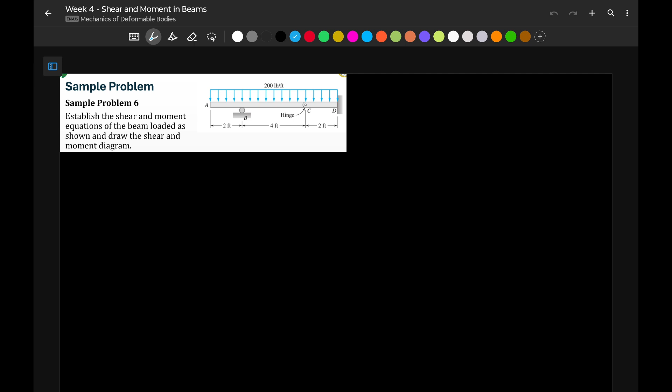Magandang araw. So we have here a sample problem of shear and moment diagram. We have a beam A, B, C, D, with the zones indicated. It is subjected to a uniformly distributed load of 200 pound per foot. Initially, this beam looks like a propped beam, but if we look closely, there's an internal hinge at point C, which makes it a statically determinate structure. So for structures like this, we normally cut at the hinge, and the hinge becomes a pin support.

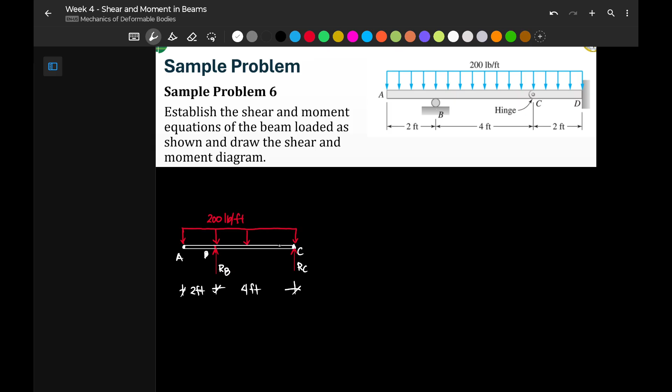Now let's proceed with the lengths or dimensions of the beam. We have 2 feet here, then on this side is 4 feet. We can take summation of moments at any point to determine the reactions. Let's take moment at point C first since it's easier here, because at point B, the rectangular load would be divided in two.

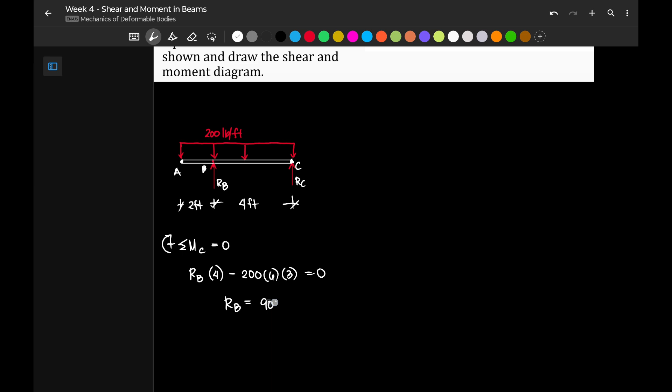So summation of moment at point C equals 0, assuming clockwise positive. We have RB, which is clockwise, so RB multiplied by 4 feet, minus the uniformly distributed load which is 200, total length 6 feet, so half of its length is 3 feet, equivalent to 0. So RB is 200 times 6 times 3 over 4, we get 900 pounds. That is the reaction on B.

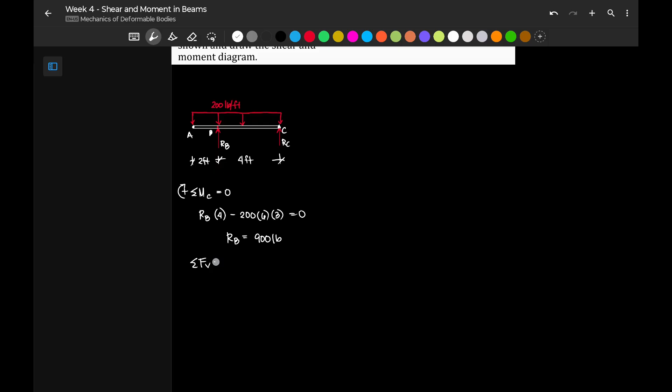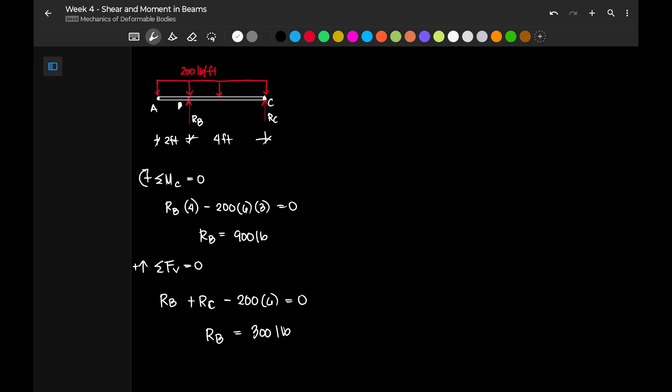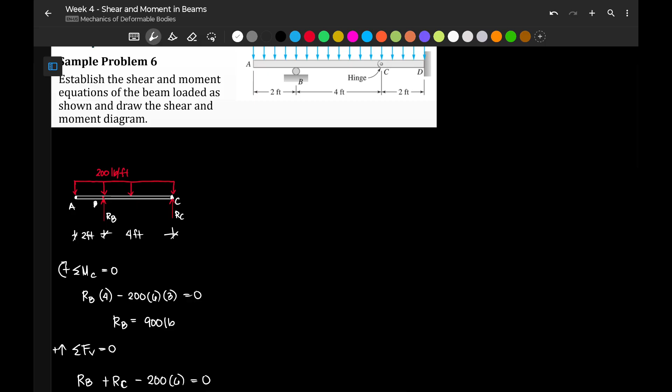I took moment at A. Next, since we already know the reaction at C, let's proceed to the second segment of our beam, which is bar CD. For bar CD, we have a fixed ended beam or fixed support here. This one's a fixed support. The uniformly distributed load of 200 pound per foot is still there.

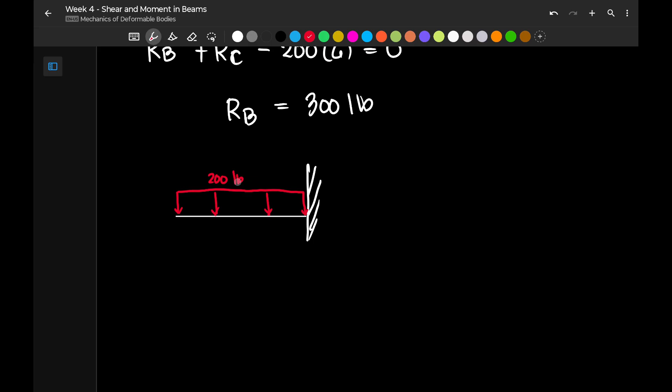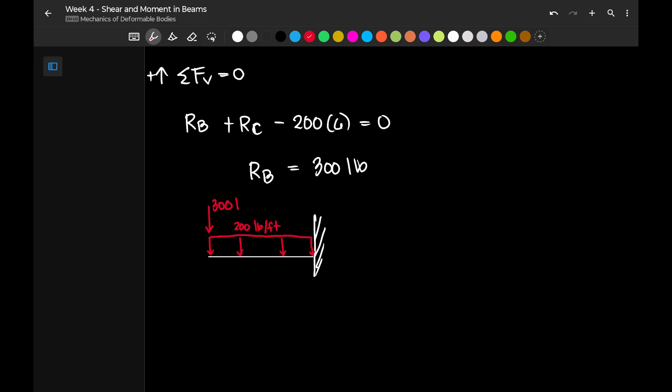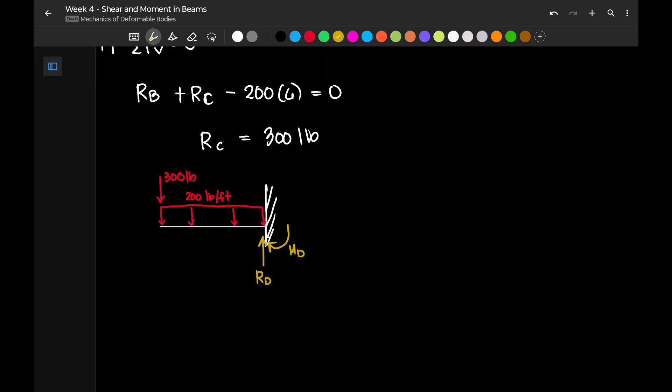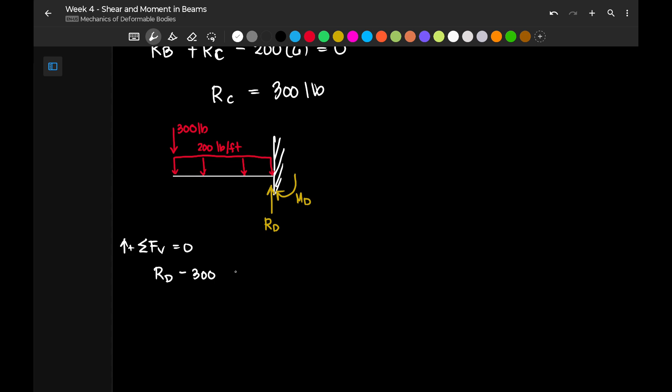Let's take summation of forces vertical to determine the reaction at RD, assuming upward positive still. We have RD minus 300 minus 200, length is 2 feet, so this is 2 feet. So 200 times 2 feet equivalent to 0, or RD is 300 minus 200 times 2, plus actually, since we transferred it. We get 700 pounds.

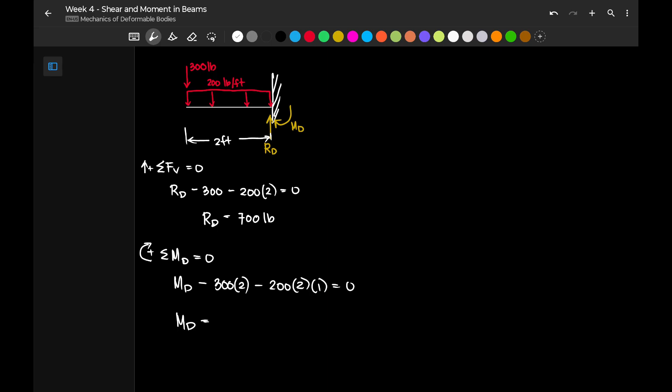Next, let's take summation of moment at point D equivalent to 0, clockwise moments positive. We have MD which is clockwise, and the rest are counterclockwise. We have 300 times 2 plus 200 times 2, with moment arm of 1, equivalent to 0. This should also be minus since it's counterclockwise rotation. So our MD is 300 times 2 plus 200 times 2, we get 1,000 pound foot. So we have now the reactions.

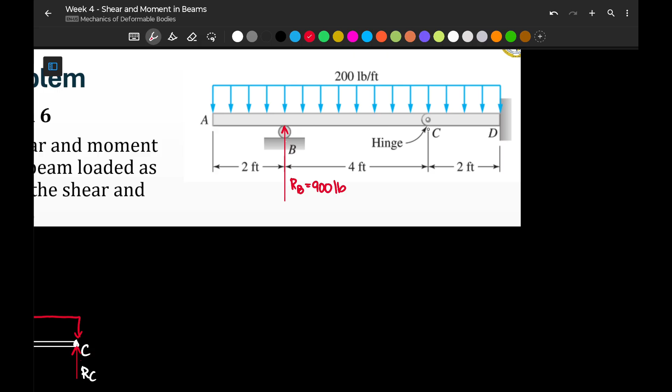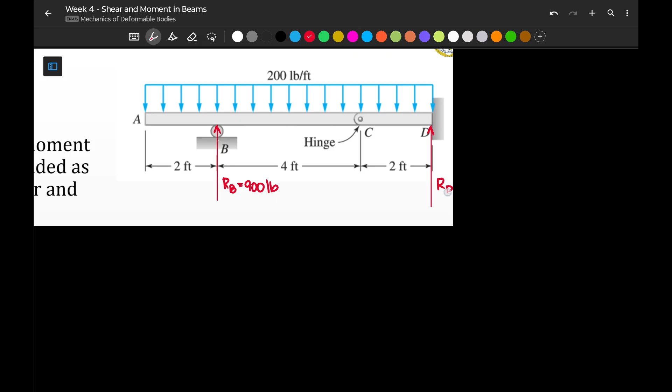So this one carries 900 pounds, RB is 900 pounds. At the internal hinge, the reactions cancel out since one is upward and one is downward. So here, we have RD which is 700 pounds, 700 pounds, and then we have the moment at D which is 1,000 pounds.

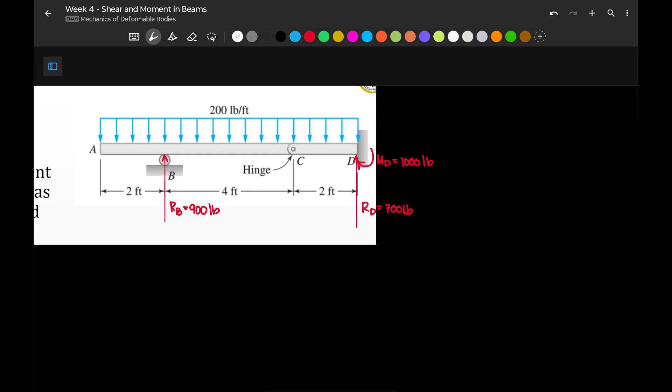1,000 pounds, okay this is our MD. Now let's solve for the shear and moment. Since meron tayong reaction, meron na rin namang na-established zone.

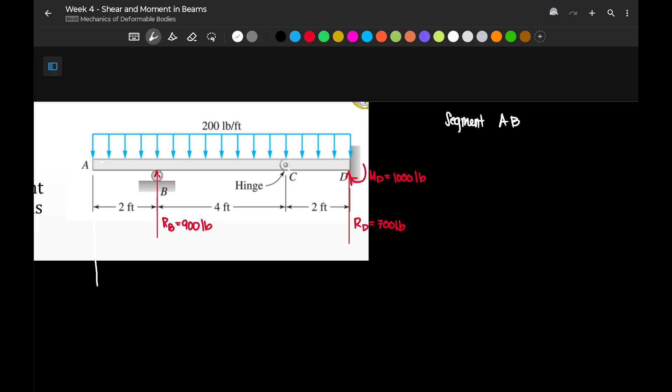So we have AB, BC, and CD as our zones or segments. We can now proceed with solving the equations. Unahin natin muna kay segment AB. Dalawang way, marami namang baseline ang pagkuha ng values of x. But since magsisimula tayo dito, pwede tayong magsimula ng x dito sa point A. Diba sabi ko kasi that time, doon sa leftmost support maglalagay ng x. Pwede rin naman doon sa overhang, okay? Pareho lang ng ibibigay na resulta.

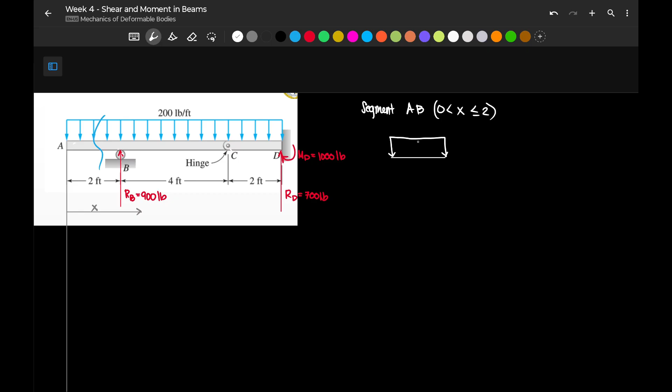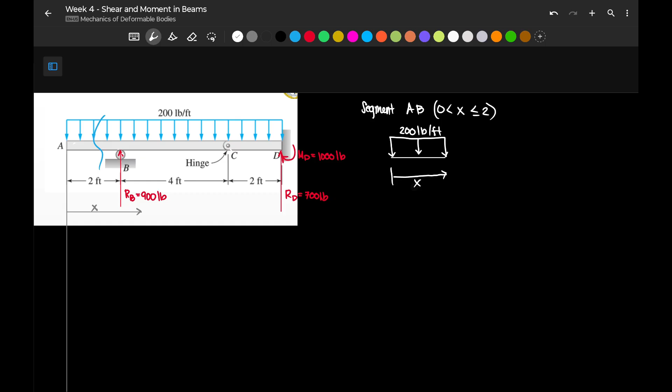Sisimplihan na lang natin ngayon. Then meron tayong vertical downward na distributed load na ang value ay 200 pound per foot. Then ang distance natin, ang length nito ay x. So since nagputol tayo, magkakaroon tayo ng internal shear V at internal moment M.

Again, assume nyo na downward lagi yung ating V at counterclockwise lagi yung ating moment. Merong purpose yan kasi gusto natin na ina-assume natin na positive shear yung gaganap and positive bending moment, no?

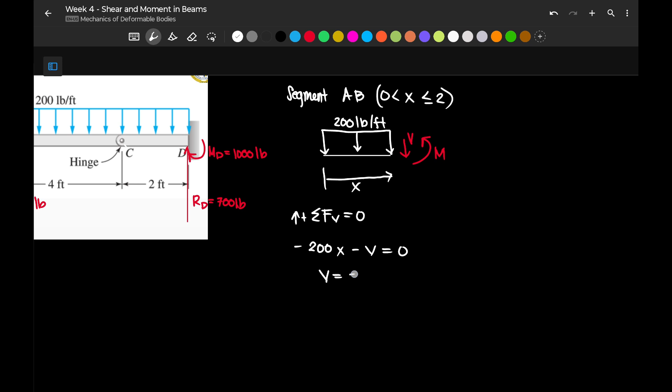Okay, so we have here summation of forces vertical equivalent to 0. Upward is positive. So we have 200 negative kasi pababa ito, pound per foot multiplied ang kanyang distance ay x minus V is equivalent to 0. So our shear is negative 200 and x.

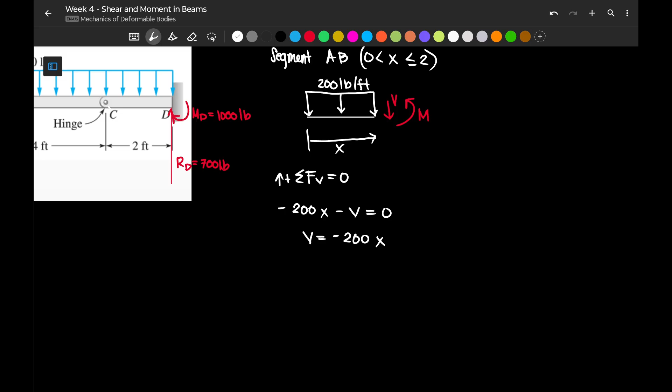Okay lang, negative yung shear kasi lahat ng force pababa itinutulak yung ating beam mag-slide downward. Diba pag nag-slide downward yung beam natin, ito bumaba, ito tumaas. That is a negative shear. Okay, so tama ang assumption natin, o tama yung consideration ng sign natin.

Then let's take moment. So summation of moment tayo doon sa point of cut kung saan tayo nagputol. The summation of moment here should be equal to 0, assuming that clockwise are positive. So wala tayong clockwise moment dito, puro counterclockwise. Yung una meron tayong 200 pound per foot na ang length niya ay x. Then meron tayong moment arm na x over 2 para sa 200 pound per foot. Then meron tayo ditong counterclockwise moment, so minus din, equivalent to 0.

So our moment at segment AB, negative, magka-cancel na ito, so 100 na lang, 100x squared. So ito ngayon yung ating moment and shear equations for segment AB. Puntahan natin yung next part.

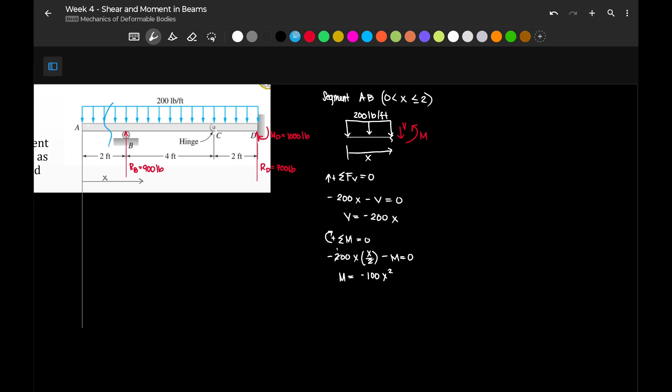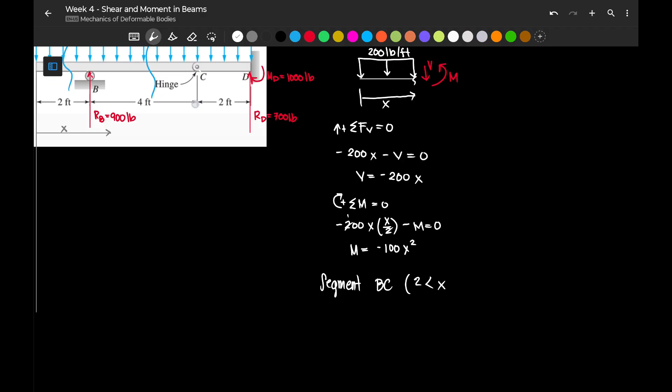We have segment BC. So for segment BC, the values of x now should be greater than, mas mataas na sa 2. Hindi pwedeng less than 2 kasi kapag less than 2, nandun ka kay segment AB. Kailangan BC lang. Si B ay mas mataas sa 2, so greater than 2, pero mas mababa dito, which is 6 feet from our support. So less than 6 feet tayo. Okay, so these are the values of x.

Let's get the beam. So assuming na ito yung ating beam, nandyan pa rin yung ating uniformly distributed load na 200 pound per foot. Tapos this is our point A. And assumingly that this is our point B, meron daw tayo ditong reaction na 900 pound.

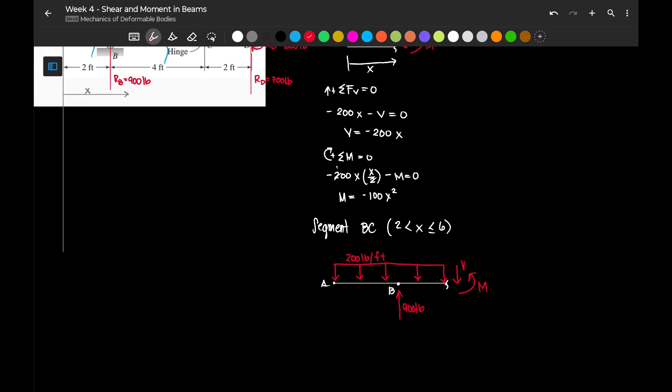So nagputol tayo dito. Meron tayo ngayong mga internal reaction, pababa na shear at counterclockwise naman na moment. Okay, so ngayon let's take summation of forces na. By the way, dimensions muna pala, so this part is 2 feet.

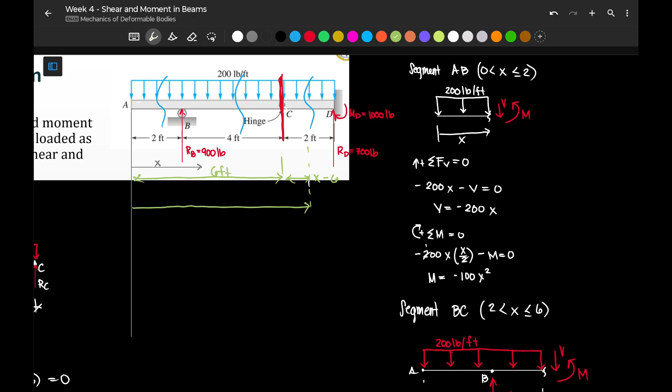Ito yung cut natin na x. Take note, ito ay 6 feet. So yung maiiwan sa atin dito na part, that is x minus 6. So yung part na to is only x minus 6.

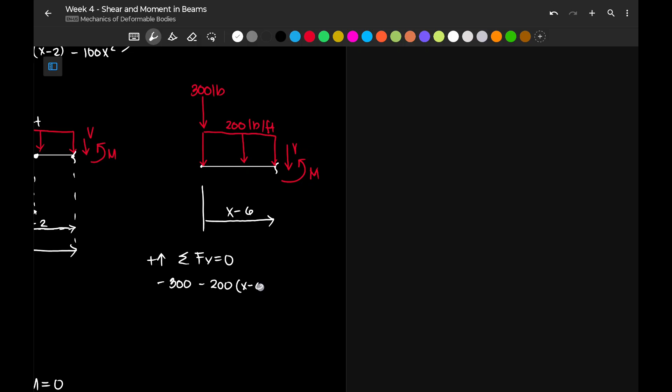Okay, now if we take summation of forces vertical equivalent to 0, upward force are positive. So what we have now is, wala tayong upward force dito. So we have 300 pounds negative minus 200, ang kanyang length ay x minus 6, then minus V equivalent to 0. Expand natin, negative 300 minus 200x, then pag ito inilipat ko, this will become positive 1,200 equivalent to V. Lipat ko na yung V doon. So our v is 12 minus 300, 900 minus 200x.

So actually, pareho lang nito, so you can expect na pareho lang din yung moment, no? So ang moment lang natin or ang shear and moment equation lang natin ay dalawa, yung nandito sa segment na to at nandito sa segment BD. AB and BD lang. Again, si internal hinge, hindi na siya nagmamatter kapag dating sa shear and moment kasi nagka-cancel out lang yung kanyang action doon sa ating beam. Okay, so let me just delete it and punta na tayo sa shear and moment diagram ng beam na ito.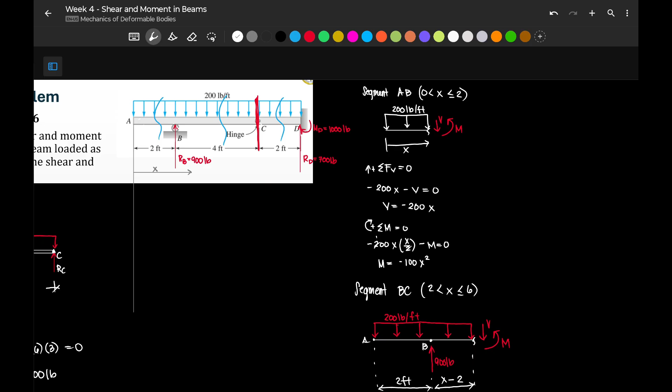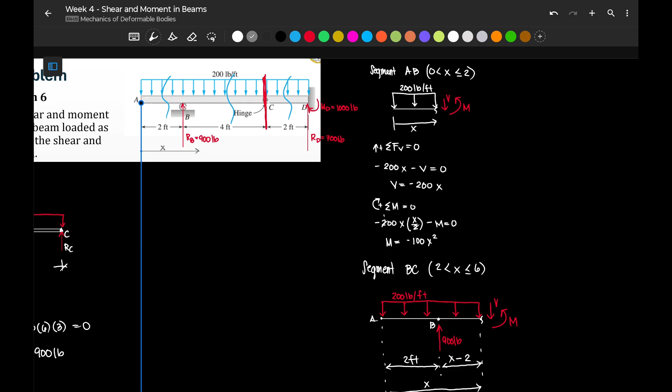Okay, let me just... hindi makopy. Gawa na lang tayo ng bago.

Okay. Then ilalagay ko pa rin si hinge kahit na hindi siya nagmamatter, no? Papakita lang natin para lang ma-indicate na meron pang special points doon.

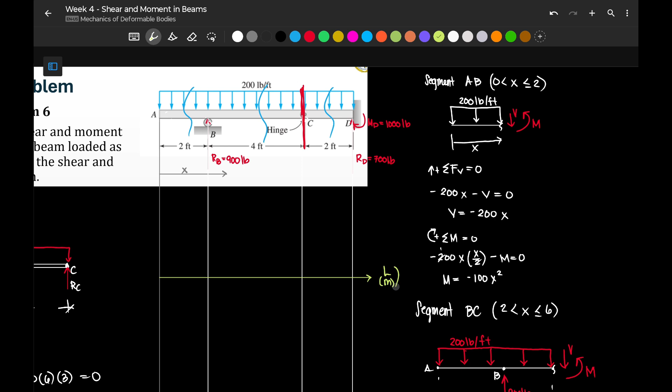So drawing na natin yung shear diagram. We can use either area method or we can use this formula or equations. So dito mas madali na yung area method. Shear in Newton, okay? But for the sake of discussion, kasi puro area method na tayo, let's use the equation.

So yung equation naman natin for segment A, so at A, where x is 0, our shear is 0. Pag sinubstitute ko yung 0 dito. And then, our moment naman at point A, ilagay na rin natin, that should also be 0 kasi negative 100 times 0 squared is also 0.

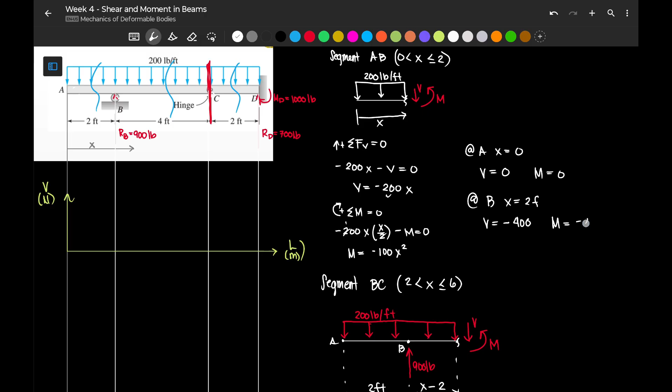Okay, at point B, where x is equivalent sa 2 feet, our shear is negative 200 times 2 lang. Then our moment naman becomes negative 400. Okay, kasi naka-squared lang. Next, puntahan natin yung second part na to.

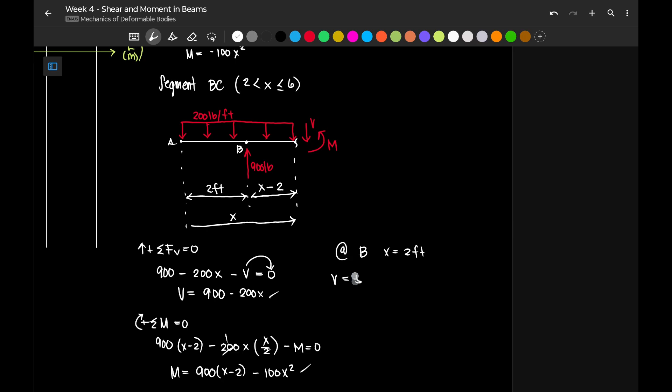At B, so at point B, where x is equivalent sa 2 feet, our shear is 900 minus 200 times 2, we have 500. And our moment at point B where x is equal to 2 is 900 times x minus 2 minus 100x squared. Calc when x is equal to 2, this is still negative 400.

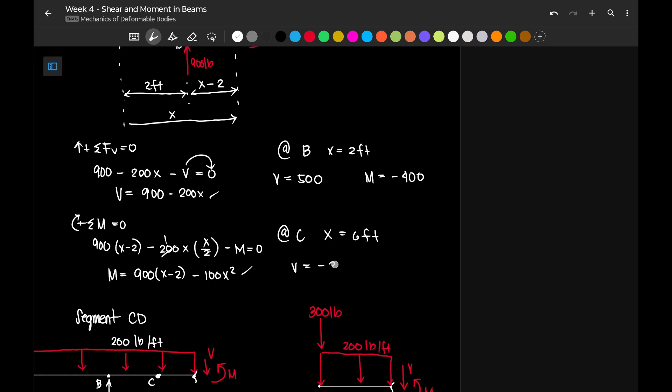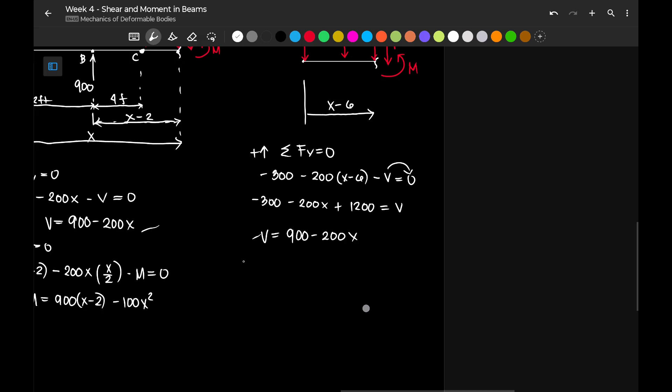Now, at point C, where x is equivalent to 6 feet now, okay? So our shear there is 900 minus 200x. Calc natin, when x is 6, we have negative 300. Then puntahan naman natin yung moment. Calc when x is equal to 6. Our moment is 0.

Then puntahan na natin yung at point D, where x is equivalent to 8 feet. So when x is equivalent to 8 feet, so our shear now is negative 700 and our moment is negative 1,000. Okay, so we have now the values.

By the way, we can now change the limit since na-prove na natin ito kanina na yung ating hinge, internal hinge, ay hindi nakakapagbago ng ating shear and moment diagram. Okay, so pwede na nating i-extend yung limit nito hanggang sa pinakadulo, 8 na. Okay, so segment BC na siya, na rin si segment CD. Diretso na siya. Okay, let's plot the points.

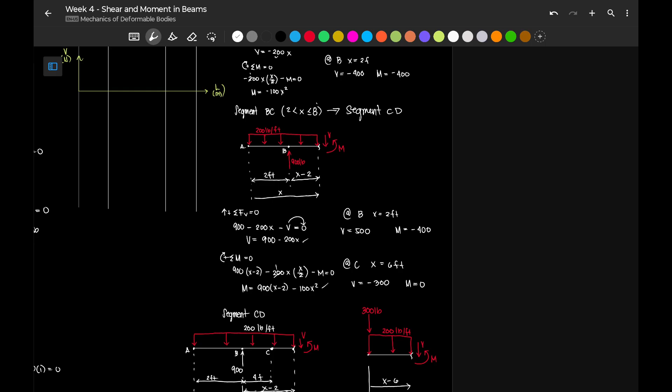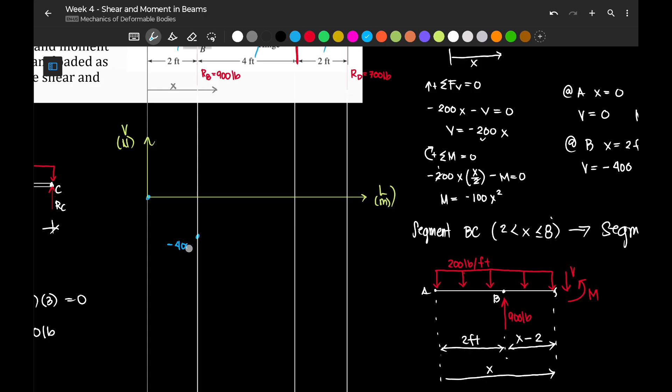For point A, our shear is 0. Okay? Pagdating sa point B, our shear ay negative 400. So assume natin na nandito, this is negative 400. And then, at point C, at point B also, on the right side, naging 500, positive naman. So from negative 400, naging 500. Ang dahilan niyan ay yung ating reaction na 900. Kaya that is 500. And then at point C, we have negative 300 naman, so negative 300.

Then at point D, we have negative 700. Okay? Then ipupush siya upward nung 700 pound force para mag-0. So lagi tayo nagsisimula sa 0 at nagtatapos sa 0. So i-plot na natin yung ating curve. Meron tayo ditong degree na, ano ang degree nito? This is degree 0. So pagka ipinlat natin, first degree lang ang meron tayo. So meron tayong straight line dito, connecting 0 to negative 400. Then, another straight line connecting negative 400 to 500.

Then here, another straight line. And then another straight line here. And we end at 0 here because of the reaction of 700. So, this is our shear diagram.

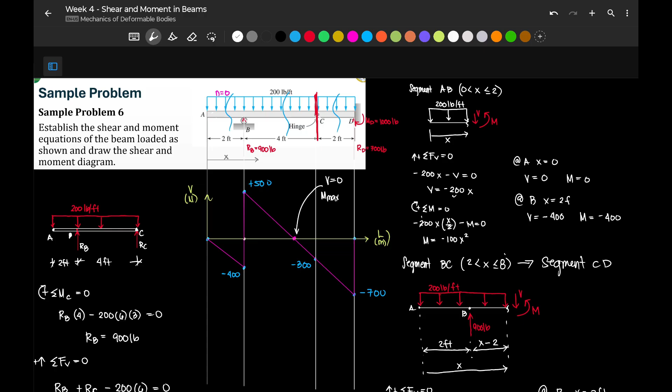Take note here, we have a very important point. We have the position of zero shear, which may be the position of maximum moment. Sometimes the maximum moment is there, but sometimes it's not. Sometimes it's zero shear too, it also passes through zero. So sometimes it's here, sometimes it's there, or sometimes neither, depending on the presence of a moment on our beam.

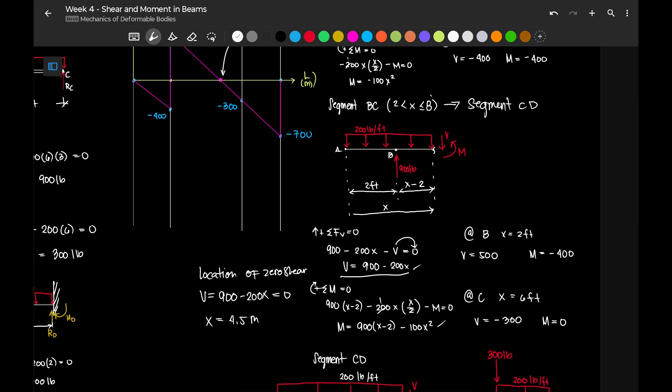9 over 2, we have 4.5 meters. That 4.5 meters is x, meaning this distance is measured from the left support. So this is 4.5 meters. So from here to here, if this is 2 feet, this is 2.5 feet.

So let's plot now our moments. Again, this is our length in feet. I'm used to Newtons, so this is in... pounds rather. This is in feet, this is in feet, and then our moment is moment in pound-foot.

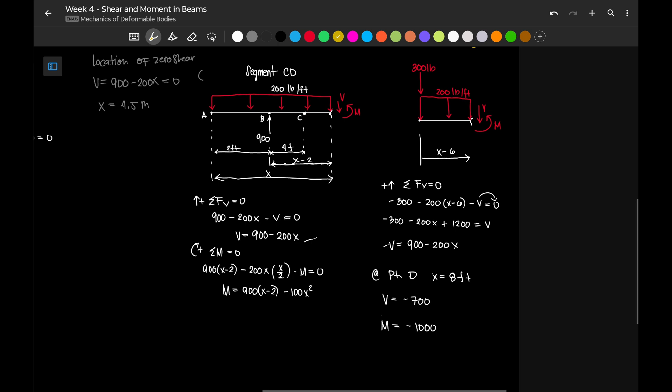Alright, let's continue drawing. Negative 400 at B, and at that point also we got negative 400. But at point C, it becomes 0. So we're at 0 there. Then at point D, we have negative 1,000. So there's negative 1,000 there, negative 1,000. Okay, but we missed something.

We have a maximum moment here, at the position of zero shear. So let's find the value of the moment at the point of zero shear. Where is this? There it is. Okay, so let's take the moment at zero shear.

Moment at V equals 0. So the moment equation we'll use is for that segment. So our M is 900x minus 2 minus 100x squared. So our moment is 900 times x minus 2 minus 100x squared, where our x is 4.5 meters. So we have here positive 225. So at this point, we have a positive 225 pound-foot moment.

So let's connect the dots. This is degree 1, this is also degree 1, and this is also degree 1. We can expect all our curves to be second degree.

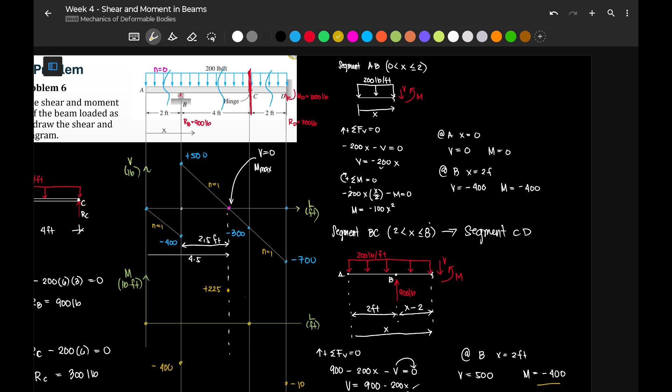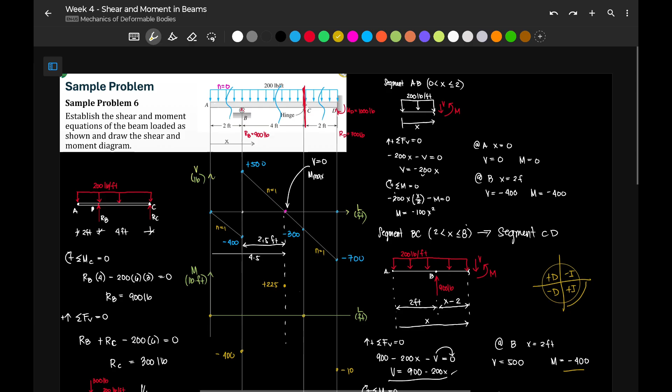So going back to our PNDI circle, we have positive D, negative I, negative D, positive I. So here we have negative because it's going down, negative increasing. So our curvature is in this fourth quadrant. Oh sorry, this one is actually positive increasing. So this is negative increasing.

So this is our curvature, and the degree of it is 2. Then here, we have positive decreasing. Positive decreasing, so this is our curvature in quadrant 1. So this is a positive decreasing of degree 2.

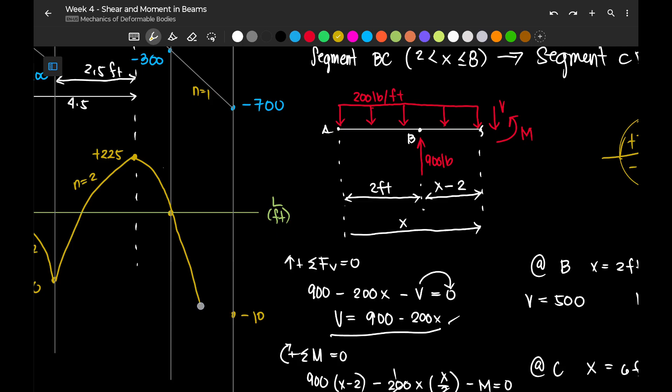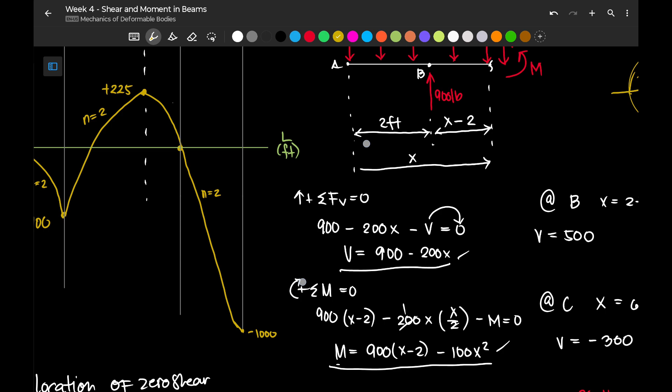Ayan, pwede na po yan. N is equal to 2. So dito, lipat na lang natin ito. This one is negative 1,000. Pero take note, meron tayong positive 1,000 moment dito. So it will close out our moment diagram. So magsisiro pa din. So ito ngayon yung ating moment diagram.

Now, there is one important question dito. May tanong yung problem: what is the location of the point of inflections or the point of contraflexure? Sulat ni sir: point of inflection or point of contraflexure. So ano ba yung point na tinutukoy, ni inflection or ni contraflexure?

Yung points na yan ay yung point kung saan nagsisiro yung moment natin. Again, yung point na to is when the value of our moment is zero, or nagpapalit ng sign convention from positive to negative. Sir, bakit importante si point of inflection?

Kasi sa point na to, dito nagkakaroon ng transition yung ating beam from tension to compression. Pag kasi yung beam natin nagbe-bend positive dito sa part na to, parang ang magiging bending ng beam natin dito, di ba sabi natin pag positive ang bending, nag-i-smile yung beam. So dito possibly nakasmile yung beam natin.

And since positive naman yung ating moment dito, nakasmile, nakangiti yung beam natin, dito naman pagdating sa mga negative moment, nakasimangot naman yung beam natin. So nakasimangot na ganito, ganyan yung bending ng beam natin. Kaya importante si point of contraflexure kasi siya yung nagsasabi kung saan nagkakaroon ng positive concavity or negative concavity yung ating beam, or kapag concave downward or concave upward yung ating beam.

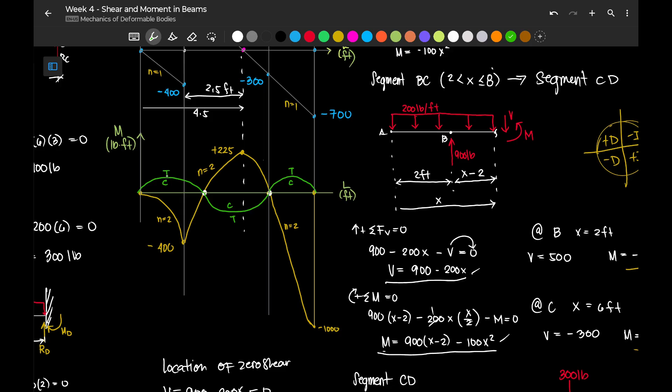Kaya importante yan. Bakit? Kasi kapag nag-smile yung beam natin dito, yung ilalim natin nasasubject to tension, yung ibabaw ay sa compression. Pag naman nagiging sad yung beam natin, or negative yung moment, yung ibabaw naman ang tension, yung ilalim naman ng compression. So nagkakaroon ng transition yung ating beam from tension to compression, compression to tension, under the point of inflection. Kaya importante ang mga points of inflections.

So ngayon, ang tawag dito sa green line na ginawa natin, this is the elastic curve or the elastic diagram of the beam. Basically, ito yung itsura ng beam kapag nagbe-bend na siya under this condition. So ganyan siya nag-bend.

So let's try to solve for the points of inflection. May dalawang paraan: pwede tayong gumamit ng squared property of parabola, pwede rin naman tayong gumamit ng equations. So mas madali gamitin na lang natin yung equations kasi nasa iisang segment yung ating point of inflection. So ito lang yung ating formula.

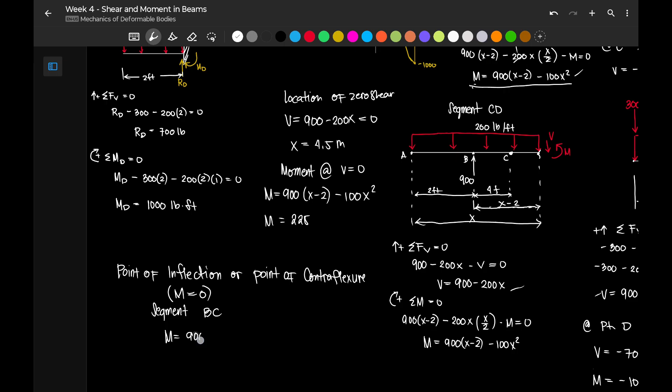So our formula for points of inflection, pareho silang nasa segment BC. So our equation: moment is equivalent to 900 times (x minus 2) minus 100x squared.

So ang gagawin lang natin, i-equate natin ito sa 0. So magkakaroon ng 2 values of x diyan, we have x1 and we have x2. Ano yung magiging values? 900... pwede kayong mag-shift solve kung nahihirapan, pero dapat masanay din kayo ng transpositions. Basic manipulation is important. So shift solve muna for now.

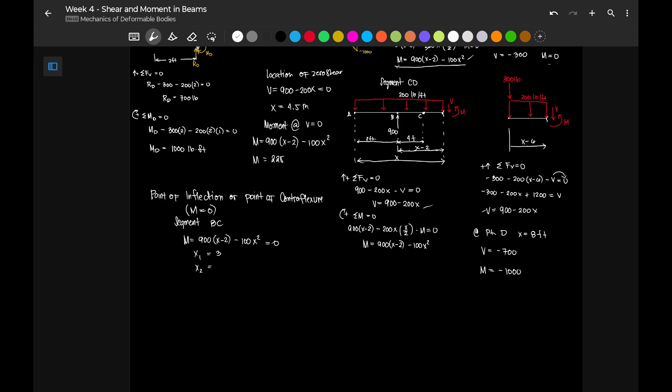So ang unang point natin ay 3. So itong distance na to ay 3. Then the next point natin, shift solve tayo pero pili tayo ng higher value. Kung titingnan natin, mukhang nasa around 6 feet yung isa. So try natin na 6. And tama yung hinala natin. So nandito yung isang point of inflection.

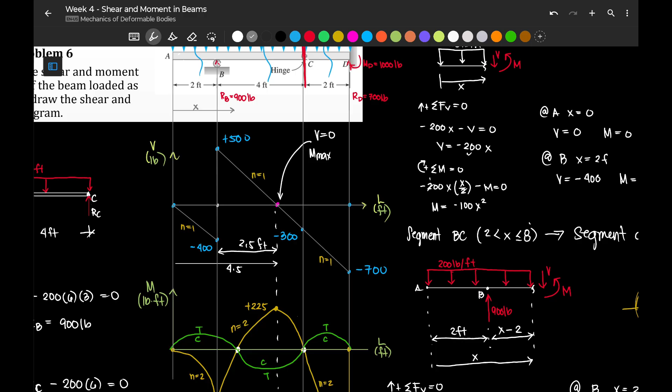So kung ang tanong ng problem, kasi meron tayong support dito, sabi ng problem, find the point of inflection from support B. Kung galing sa support B ang measurement natin, kung from point B ang measurement natin, ito ay 1 meter lang kasi ito ay 3 meters coming from the reference point of X, di ba? So dito yung reference ng X. So ang matitira na lang ay 1 meter kasi ito ay 2.

Sorry, units nga pala natin ay feet. Nako-confuse ako sa units, okay, sorry, I apologize for that. So 1 feet na lang coming from our support B. Andito rin yung isa nating point of inflection which is at 6 feet, or that is roughly around 4 feet from our point B.

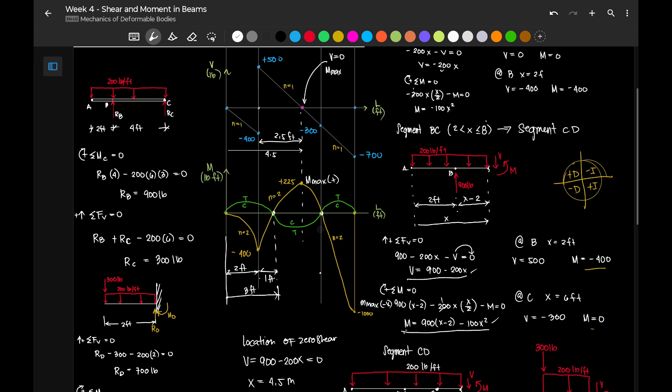So ito yung mga types ng question na mai-encounter natin. May maximum moment, so the maximum positive ay ito, M max positive. Tapos ito naman yung maximum moment natin na negative. Then ito yung maximum positive shear and then the maximum negative shear. So iyan ang ating shear and moment diagram for this.